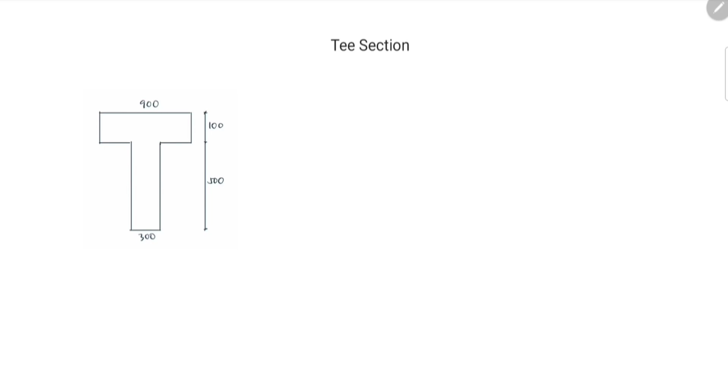Ang gagawin natin first is find the area. To solve for the area, i-divide natin yung T-section into component rectangles. Yung web, tawagin nating area 1, and yung flange is tawagin nating area 2.

Area 1 is equal to 300 by 500, or equal to 150,000. Area 2 is equal to 900 by 100, or equal to 90,000. So the area of the T-section is equal to area 1 plus area 2, equal to 240,000. Next step is locate the centroid of the T-section.

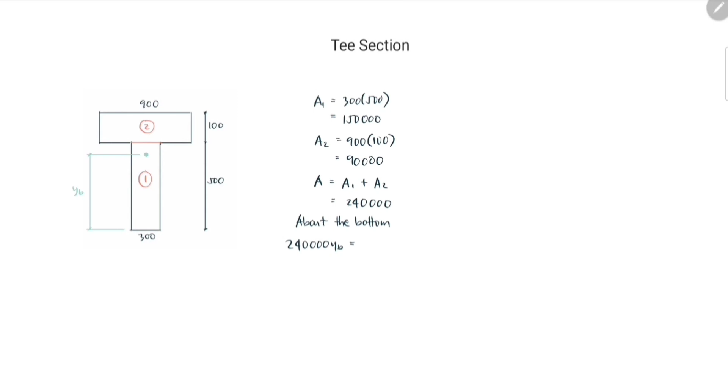Say ito yung centroid, at yung distance niya from the bottom is tawagin nating YB. And to solve for YB, we take moment of area about the bottom. The moment of the total area about the bottom is 240,000 times YB, and it is equal to the sum of the moment of the component areas about the bottom.

For area 1, the moment of area is 150,000 times the distance of its centroid from the bottom, which is 1/2 of 500. Then plus the moment of area 2, which is 90,000 times the distance of its centroid from the bottom, which is 500 plus 1/2 of 100.

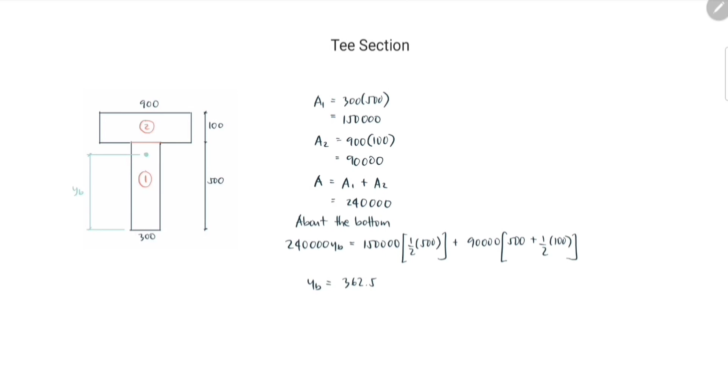So YB is equal to 362.5. Ngayong alam na natin yung distance ng centroid from the bottom, that is 362.5, then itong distance na ito is 500 minus 362.5, equal to 137.5.

Next step is solve for the centroidal moment of inertia. Gamitan natin ang dalawang solutions. Solution 1, gawa tayo ng plane passing through the centroid.

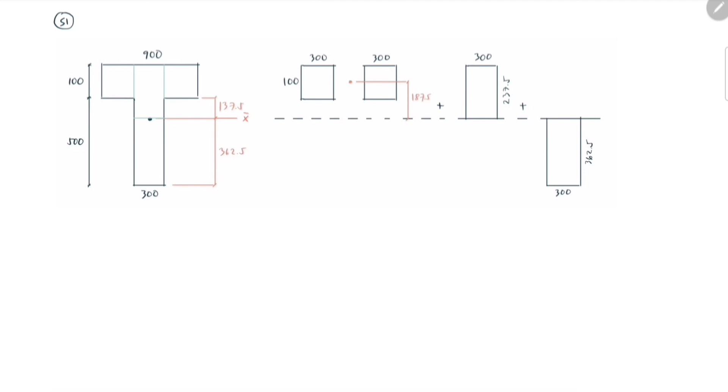So nahati yung T-section into two parts, the upper part and the lower part. And yung upper part, i-subdivide natin into component rectangles. So ang nangyari, yung T-section ay nahati into three parts. Then solve for the moment of inertia of the three parts about the x-bar axis.

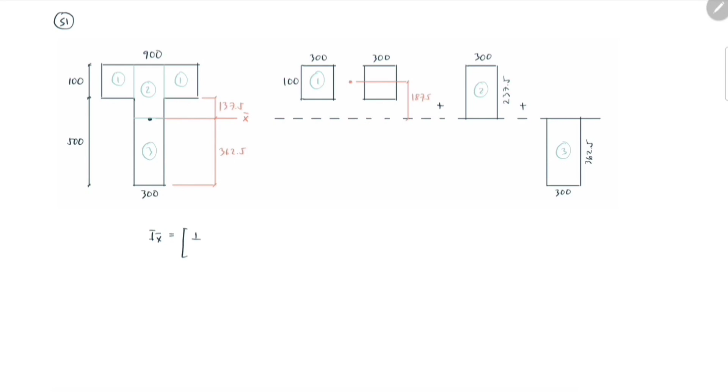So Ix bar is equal to, para sa first part, yung centroidal moment of inertia nitong rectangle na ito is 1/12 times the base is 300, the height is 100 cube. Then i-transfer papunta sa x-bar axis, so plus the area distance square. The area is 300 by 100 times the distance is 187.5 and then square. And dahil dalawa sila, so times 2.

Then plus, para naman sa second part, the inertia of the rectangle about its base is 1/3 times the base is 300, the height is 237.5 cube. Plus, para naman sa third part, the inertia of the rectangle about the base is 1/3 times the base is 300 times the height is 362.5 cube.

So Ix bar is equal to 8,262,500,000, or equal to 8.2625 times 10 raised to 9.

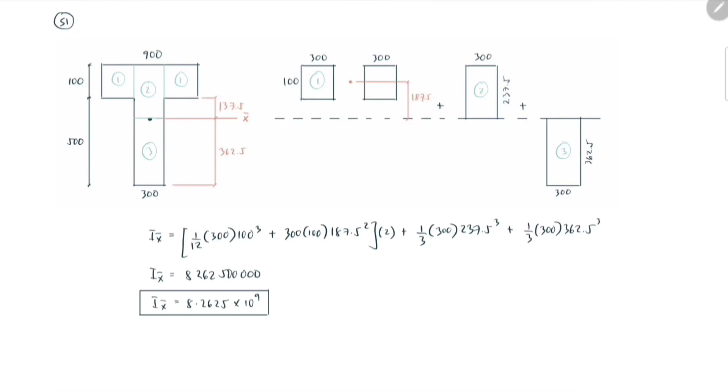Next, solution 2. Maghanap tayo ng axis kung saan madaling mag-solve ng moment of inertia. So in this case, yung axis is at the junction of the flange and the web. So gawa tayo ng cutting plane sa junction ng flange and web. So nahati yung T-section into two parts.

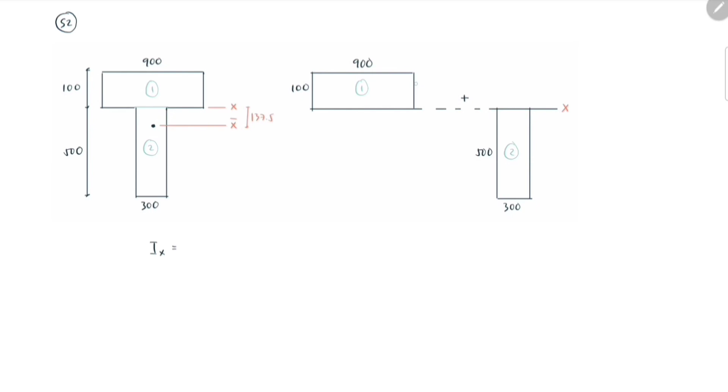So Ix is equal to, para sa first part, the moment of inertia of the rectangle about the base is 1 over 3 times the base is 900 times the height is 100 cube. Plus, para naman sa second part, the moment of inertia of the rectangle about the base is 1 over 3 times the base is 300 times the height is 500 cube.

So Ix is equal to 1.28 times 10 raised to 10.

Then apply the parallel axis theorem. Ix is equal to Ix bar plus area distance square. Ix is 1.28 times 10 raised to 10, equal to Ix bar, which is unknown, plus the area of the T-section is 240,000 times the distance D, which is the distance between the X bar and the X-axis, 137.5, and then square.

So Ix bar is equal to 8,262,500,000, or equal to 8.2625 times 10 raised to 9.